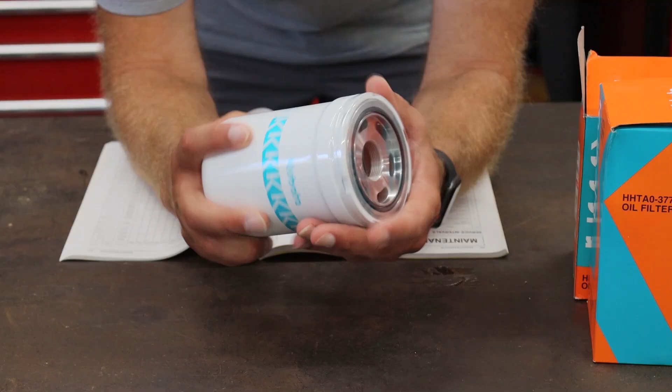So, hydrostat. And then my filter for hydraulic just happens to be a little taller. This has a magnet on it as well. So here's the hydrostat filter. Once again, hopefully you can see that this is a heavy machined flange on there. And what you can't tell is, I mean, this thing has a lot of heft to it, but just by feeling it, I can tell that the entire case is pretty thick metal.

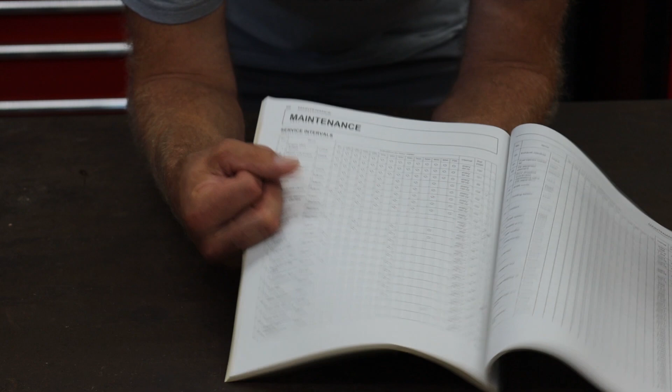Now, this guy was not cheap. He was $77, I think. But once again, I'll pay $77 instead of losing my knees or damaging a multi-thousand-dollar tractor. So, what's in a 50-hour service? Your owner's manual has it all. And the 50-hour service could not get easier than any of the others. Engine start system. You'll know that whether or not your tractor starts.

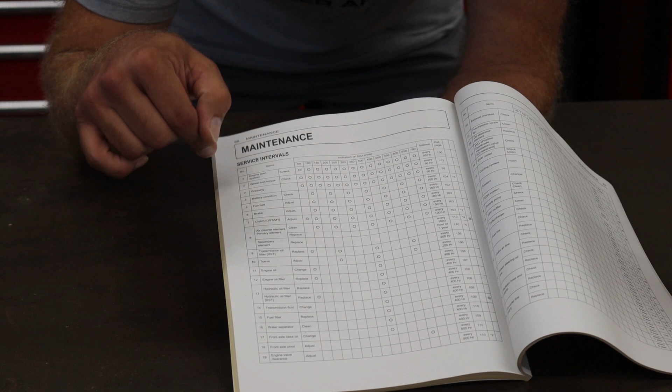Check your wheel bolt torque. Hopefully you did that when you received your tractor, and do it every so many hours when it's new, just like you should with the car and everything else. So wheel bolt torque. Greasing. Next one is if you have a GST or manual, you need to adjust the clutch. Transmission oil filter. Filter only, no fluid. Engine oil filter, and hydraulic oil filter. Once again, no fluid on that.

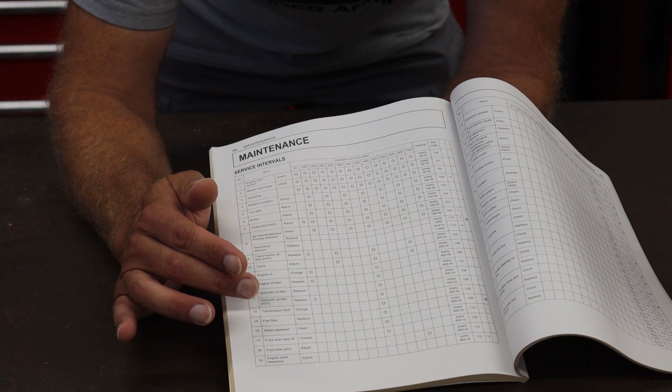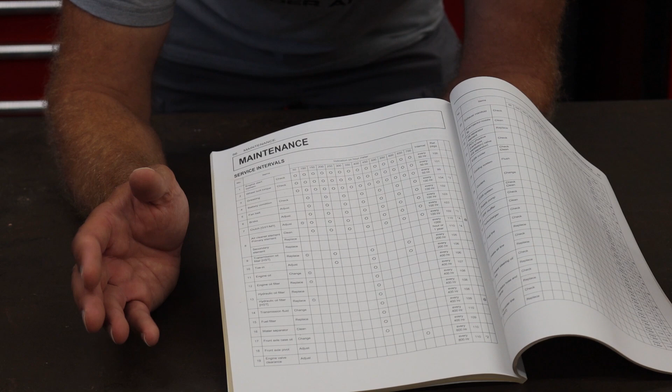The hydraulic oil in this system and most other tractors that I've seen, RTV included, is 400 hours. So nice thing is we're doing just the filters at 50 and then at 200 and no fluid until 400 hours. Now this 50-hour service is real important because this is when you're going to catch all of the junk and any initial wear parts that occurred from your tractor being brand spanking new. So that's why you have such a short interval when the tractor is brand new. So that's it, really easy.

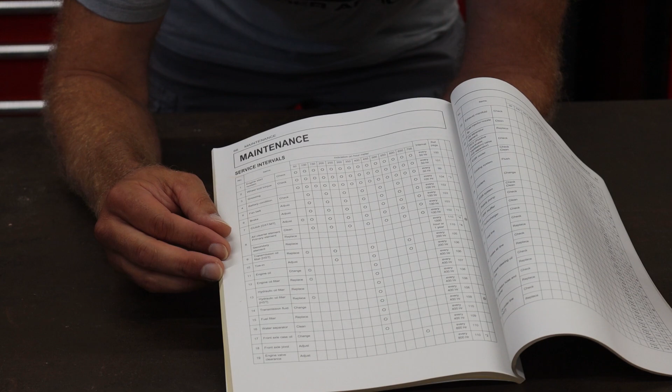And we'll check the book and figure out where all of the grease areas are for our tractor. And then I'll show you how to do each one of these as we go. So first thing I'm going to do is wipe off all of the grease zerks. Get ready to grease this.

And I'm greasing this first and doing the loader because I have it up part way. Makes it easier to get to these grease zerks in the back. And then I'll lower it. There's going to be a grease zerk for every pin, okay?

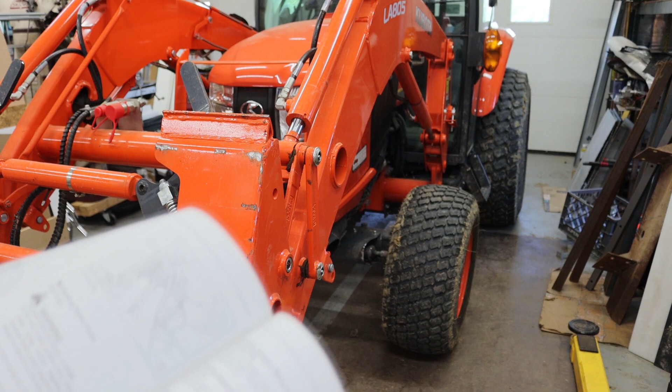On your owner's manual, you will find where all of your grease fittings are. Now there's a separate manual for your loader, but those are pretty easy. It's these other ones that are a little harder to find, like front axle support and pivot, front wheel case support, front axle support, 3-point hitch stuff, 3-point hitch cylinders, battery terminals, which is going to be spray grease, and then seat stuff, which will, I'm guessing, also be spray grease probably.

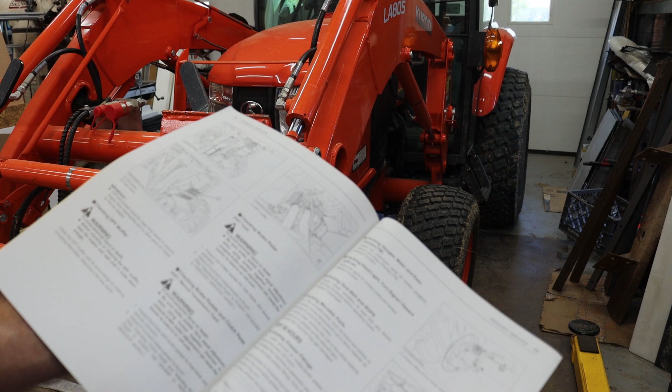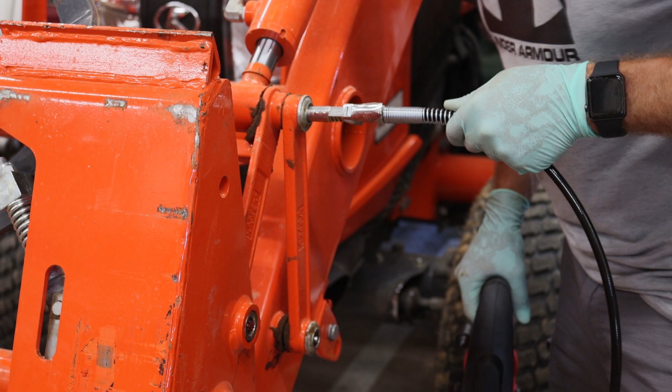I'm not going to make you guys watch me grease every fitting, but I do want you to see how this works. Now, one question on a lot of the groups is whether or not this works with the pins on the loaders, and we'll find out. Now, your loader could still be different than mine, but as of right now, mine works. Now I will come back with a paper towel afterwards and wipe off all of the excess grease.

All right, I'm sold. This is awesome. Locks right on, don't have to hold it. Without a doubt, I would get one of these. Yep, well worth it.

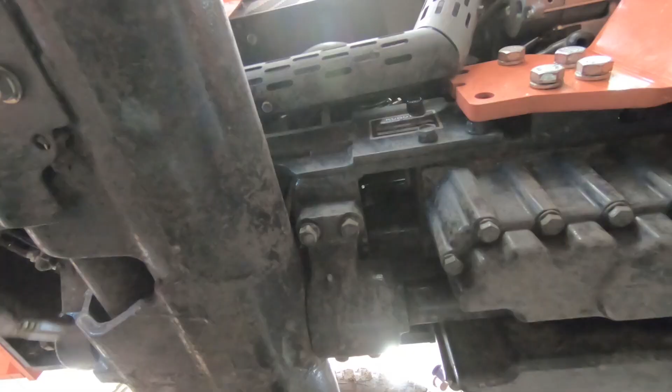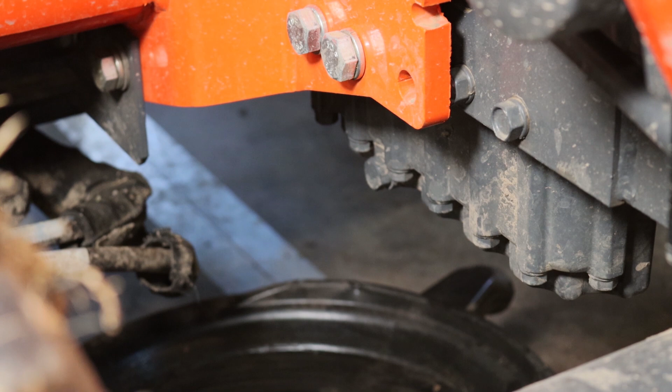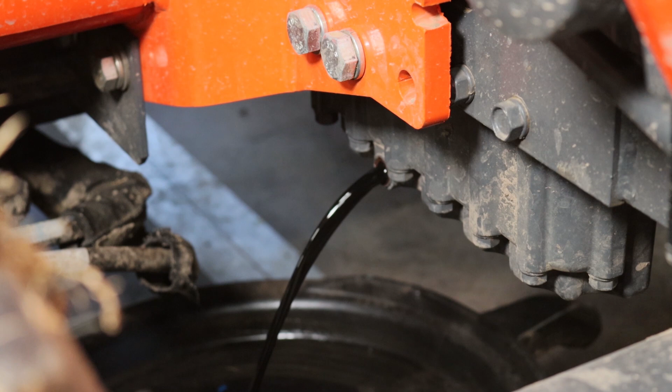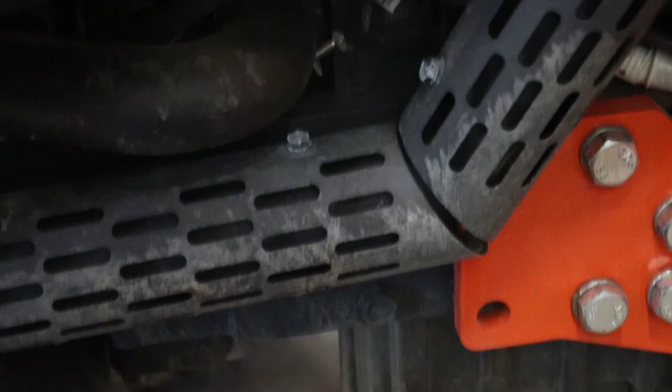Now we're going to change the engine oil. And on my tractor, I have 2 oil drain plugs. We're going to pop the dipstick here just so air can get in. So we've cracked open the drain on the other side, and here you can see the drain on this side. So once again, on this tractor, there's 2 drains, one on each side.

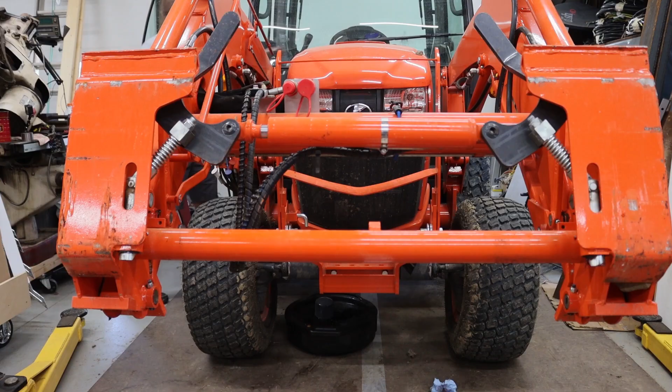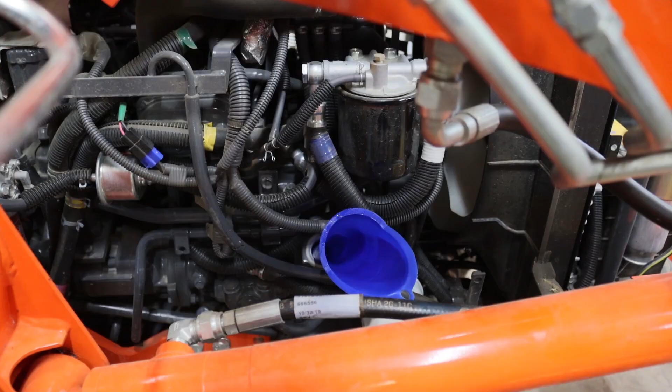So my tractor takes 7.1 quarts. All right, got just about a quart left in the jug, so we'll start it up and measure it here in a minute.

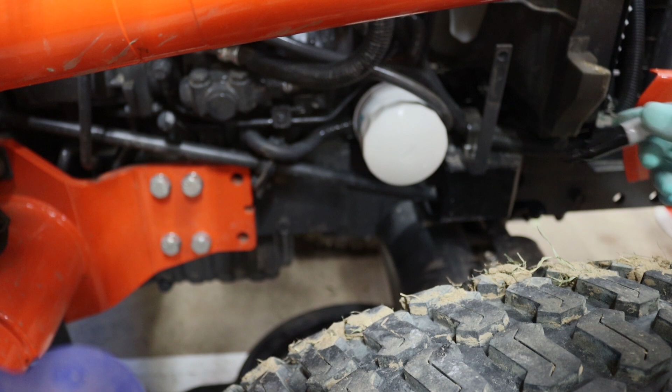Leaks. So I forgot to do this before I put it on, but I always write the number of hours on the filter. That way I don't forget. Now all I have to do is take a look at the filter and remember when my next change is, which should be on the round number, every 200, 400, etc.

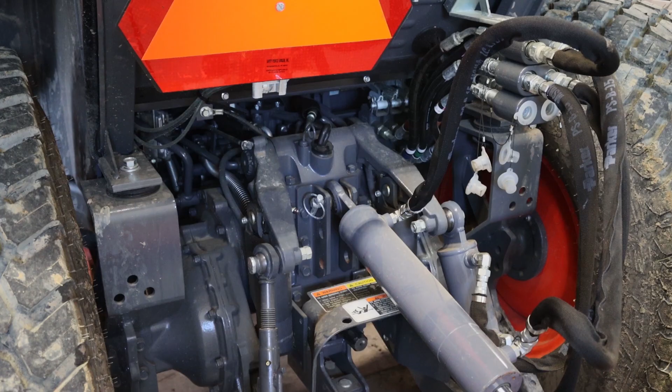So this is the fill port where we are going to apply the suction from the shop vac. And I'm going to have my son hold that here. And I've already taken both my filters and prepped them both by putting clean Super UDT on the sealing gaskets and wrote that number of hours and have them ready to go. So I'm going to have him do that, and then we're going to swap out the filters real quick.

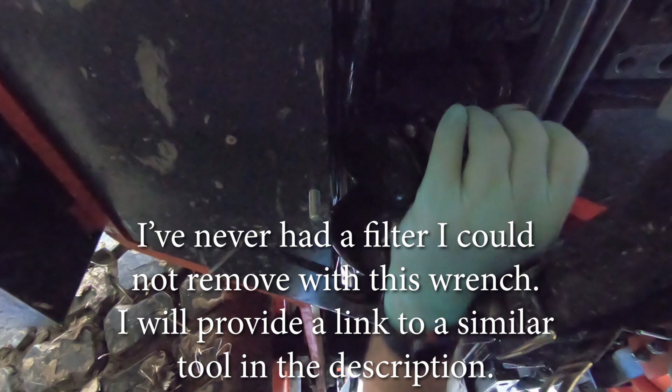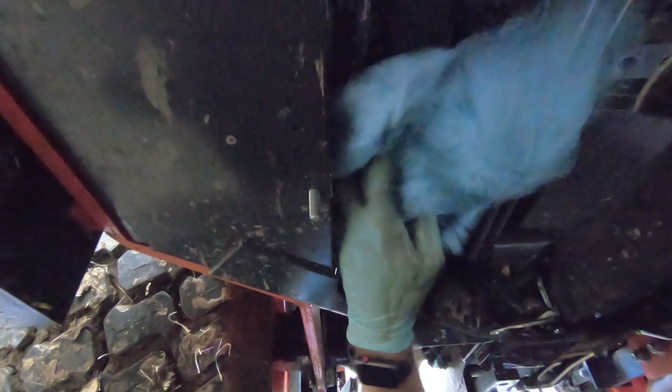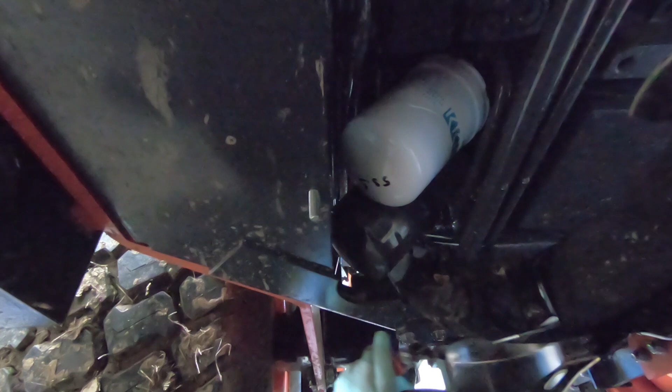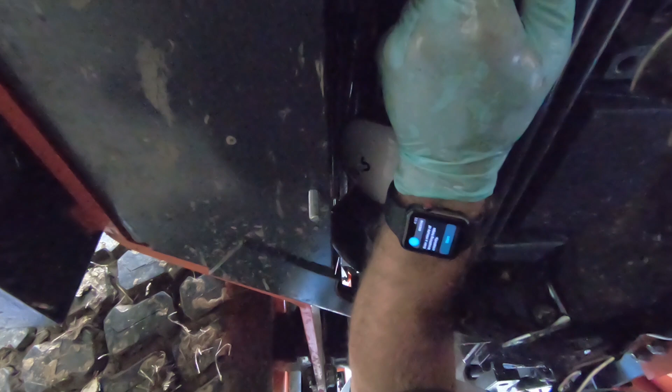Okay, put it on there. Okay, give it a break. Okay, back on.

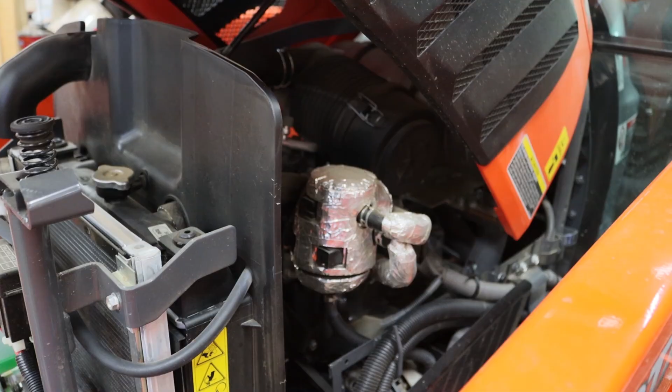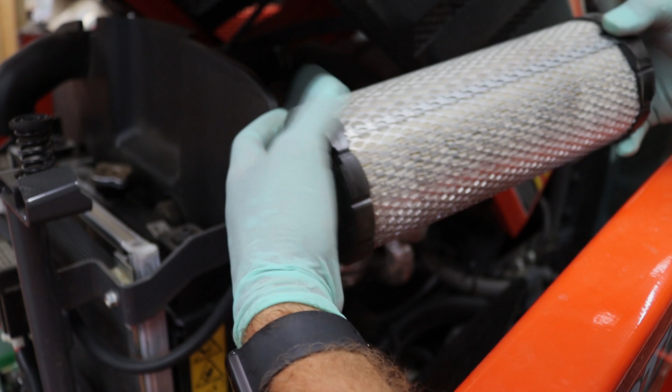So although not required, I believe it's always a good idea, I am going to also check my air filter. It's actually very, very clean. I don't even see a reason to vacuum it at all.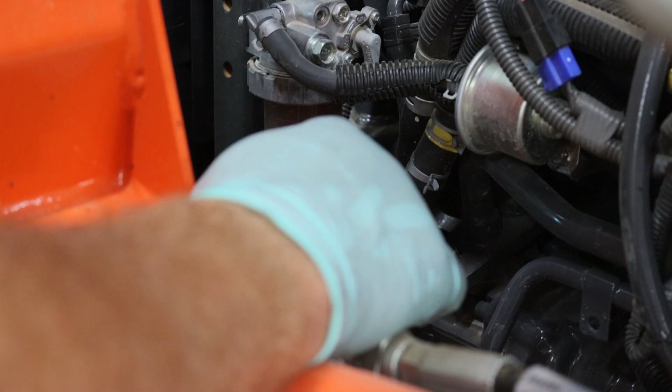Now yet another thing I'm going to check. This is something you should be doing all the time, not just at 50 hours, but depending upon the kind of tractor you have, you may have a different fuel separator slash filter. I have a separator and a spin-on canister, but my separator here, if you could tell, that right here should be down here. So that means I've actually got some junk.

Now my tank unfortunately had some junk in it, and I thought I got most of it cleaned out, but obviously I didn't. So I'm going to go ahead and pull that off, drain that, and dump that out. So this will all be red with off-road diesel.

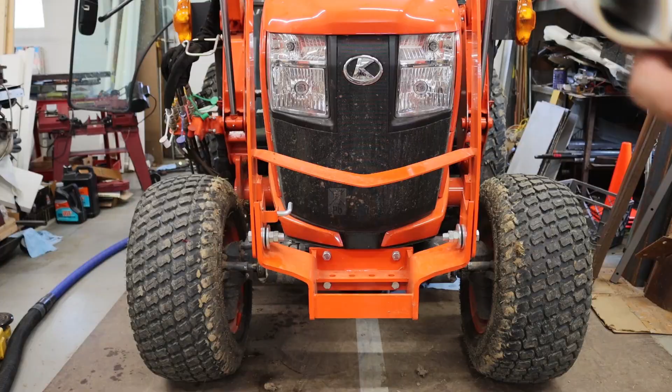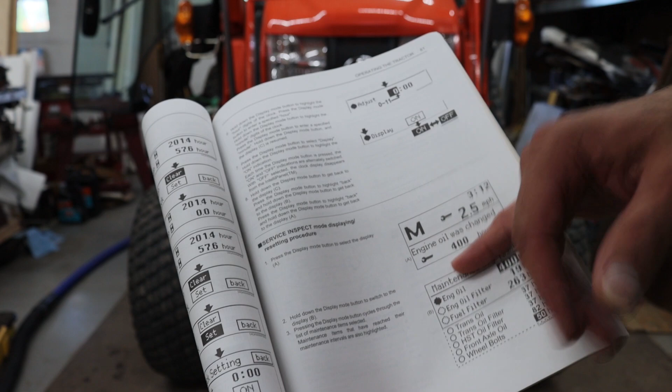All right, so we're all done. The last step is to reset the maintenance items to let the computer know that we changed it, so it won't alert us anymore. If you notice, mine beeps every time I turn it on. So if your tractor is older and it doesn't have this, obviously just disregard, but otherwise just reference your operator's manual and it will walk you through resetting this. I'm going to reset the engine oil filter and the trans and hydrostat filter and wheel bolts. I'm also going to check the front axle, but obviously I did not change that.

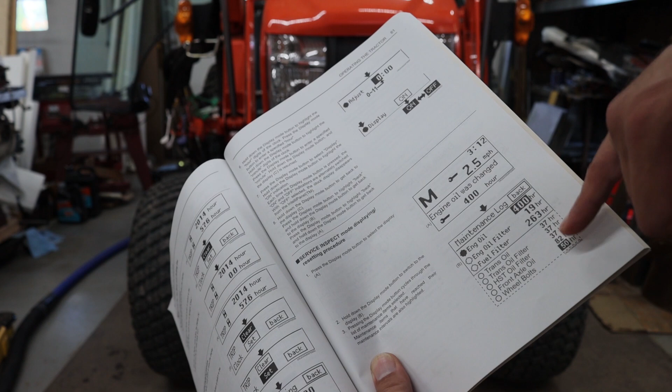All right, guys, that's it. I hope this helped you. I hope you saw how easy it was to do your own 50-hour maintenance.